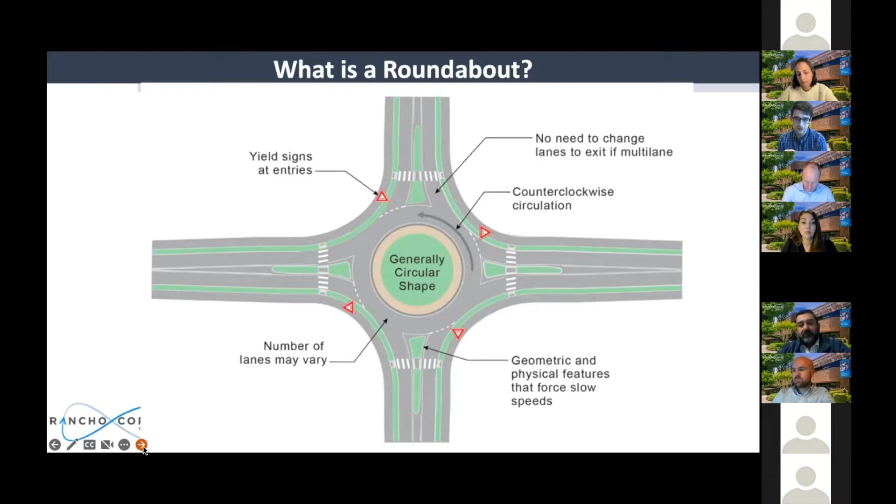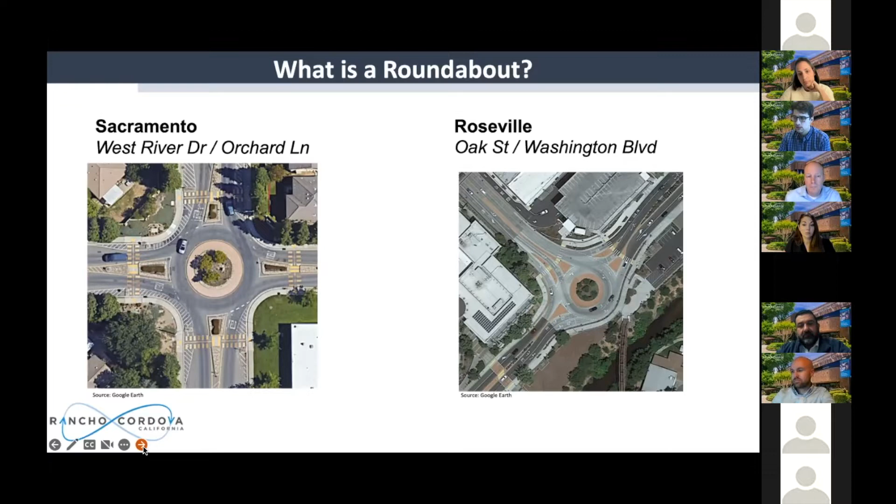Next slide, a couple relatively local examples. As I mentioned before, they can be single or multiple lanes. The one on the left here is single lane, the one on the right is multiple lane. That's also a three-leg intersection, just to show you that they can be in all manner of different locations. That's really just to familiarize yourself - maybe you've been through these before.

So the next slide - I mentioned before, why build roundabouts? Why do this, what are the benefits? Why did the city apply for a grant, why did they get a grant to study roundabouts, and what are the reasons that there's over 7,000 of these now and growing in the United States?

Well, first things first, they're a well-documented safety treatment. We have a few slides later in this presentation to document just how beneficial they are from a safety perspective, what the crash reduction stats are. They also very often have less delay compared to other intersections, so almost always, compared to a stop sign, a roundabout is going to have less delay as you're driving or biking through it.

Especially throughout the day, especially in those off-peak periods - if no one's there, you can proceed right through. And that compares to signals as well, so throughout the 24 hours of a day, you often have huge delay reduction benefits at a roundabout too. It keeps people moving, and then also the safety benefits as well.

And then the next thing is some environmental benefits with that - emissions and fuel savings come along with that delay reduction. There's some access management benefits between allowing U-turns, being able to design it to consolidate movements at and through an intersection. The other thing with a roundabout is there's no signal, no traffic signal hardware, so there's no electricity to run out to the site, so they're resilient in that way and can save operations and maintenance costs in the long term.

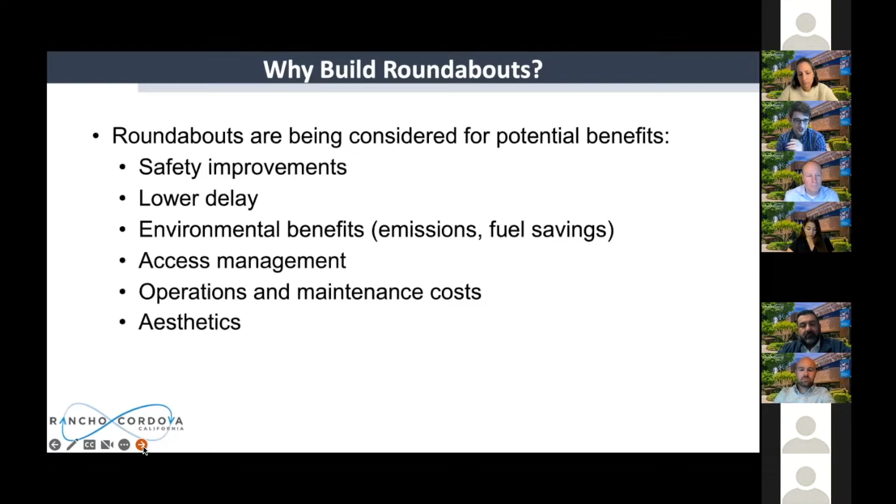And lastly, they give an opportunity for aesthetic benefits - you have this wonderful space right in the middle, you can do landscaping, you can put art there. Some cities have even - like Bend, Oregon has a city art tour where you can go around looking at roundabouts. There's other opportunities there as well.

Next slide, so I have a couple slides on the safety performance. Roundabouts have a kind of staggering safety record. They're often installed where there used to be a stop sign, and in some cases they've been installed in place of signals. There's been just about maybe over a decade of research in the United States comparing roundabouts to other intersection types and showing really staggering crash reduction. So let's go through these a little bit.

Up to 90 or 100% reduction in fatalities, a 75% reduction in injuries, 35% reduction in total crashes, and very little reported pedestrian and bicycle crash experience. Fact is, compared to other intersection types, there aren't as many roundabouts, and there aren't many pedestrian and bicyclist crashes to analyze.

Can you go back to that slide? I want to talk about a couple more things here. So why is that? What's going on with this massive fatality and injury reduction?

On the bottom of this slide, we're showing a typical perpendicular intersection on the left and a roundabout on the right. Imagine traveling through an intersection, and anywhere paths overlap or conflict, we'll call a conflict point. There's 32 of those locations in the intersection on the left.

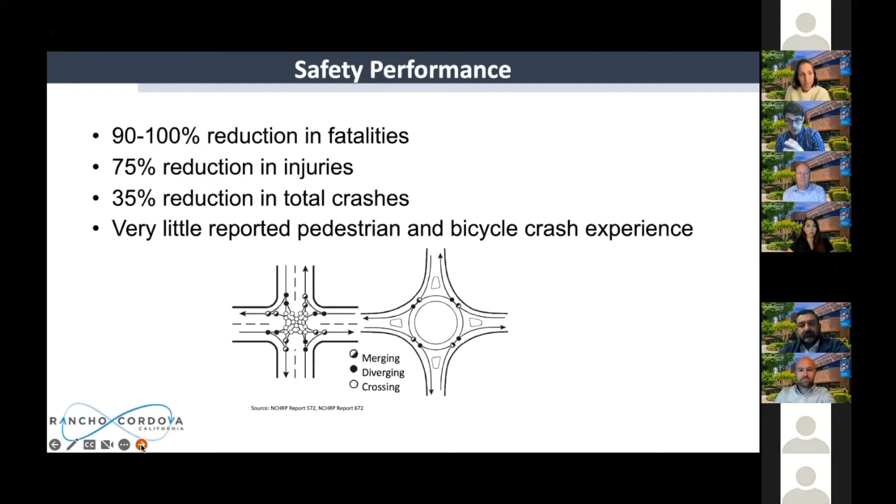In the next slide, I'm going to talk a bit more about safety, and it's really all about speed. If you follow this blue line from left to right, think about traveling through an intersection - maybe 25, 30, 35, 40 miles an hour at a typical intersection. At a roundabout, you're actually deflected, so you really have to slow down. That's one of the key design features of a roundabout, controlling those speeds, keeping them low.

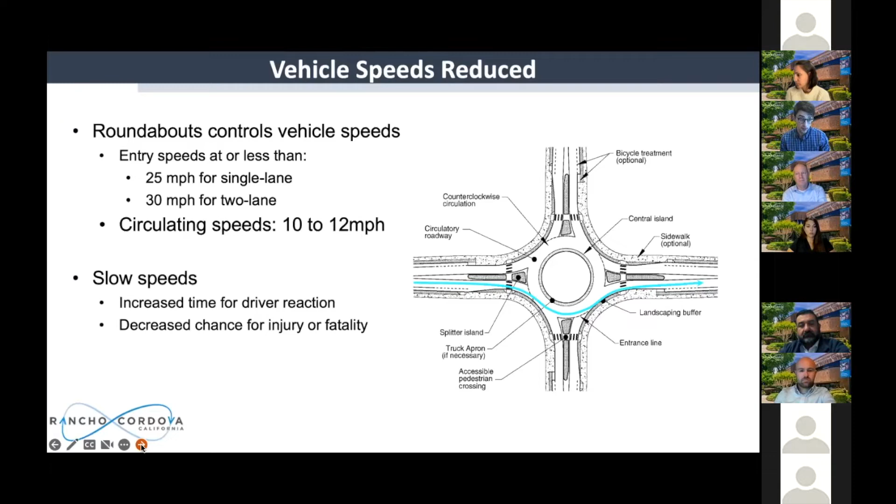So why are low speeds beneficial? Well, one, they increase your reaction time. They require less time to stop. And if and when people do crash, there's simply less energy associated at lower speeds, so there's less likelihood of a really bad outcome - you probably walk away from it. Really, it's all about that speed. That's a bit about safety.

I mentioned aesthetic opportunities before. Just wanted to share a couple of examples we have - some really nice pictures of art on the left, some lovely landscaping on the right. That's just a big, nice opportunity at the center of a roundabout.

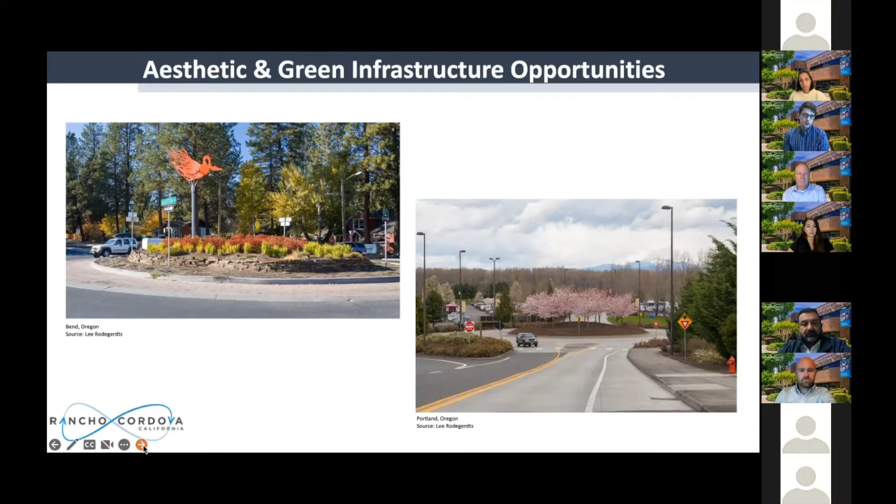Now I want to talk about some common questions that come up, and a few things related to people who aren't driving. In terms of pedestrians at a roundabout, the common question is, what do I do? How do I cross as a pedestrian at a roundabout? I want to talk about a few things - a couple definite benefits and a couple considerations. We can talk more about these in the Q&A later if people have questions.

One is, I feel like a broken record already, but the slow vehicle speed. We know through research that the likelihood someone's going to yield to a pedestrian is really related to speed. If I'm driving slow, I have the opportunity to see a pedestrian, the ability to stop, and it doesn't take me long to do so. We keep those speeds slow at a roundabout - that promotes yielding and allows people to find opportunities to cross.

The next thing is this two-stage crossing. What does that mean? If you look at the top where we have a leader that says median refuge, it essentially means you cross one direction, then stop, then cross the next direction. So you're never out there in traffic crossing multiple directions or lanes at the same time. That's what the two-stage crossing means - it really reduces your exposure and vulnerability.

A couple things in terms of considerations you might have noticed in these slides - the crosswalk location. One of the key design features of a roundabout is you pull that crosswalk off the corner a little bit. That gives drivers the ability to see you as a pedestrian and stop, separate from entering or exiting the roundabout.

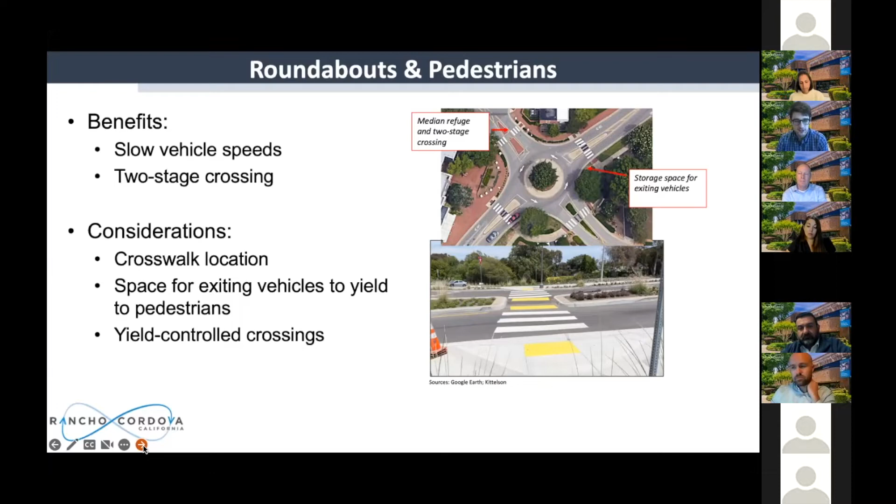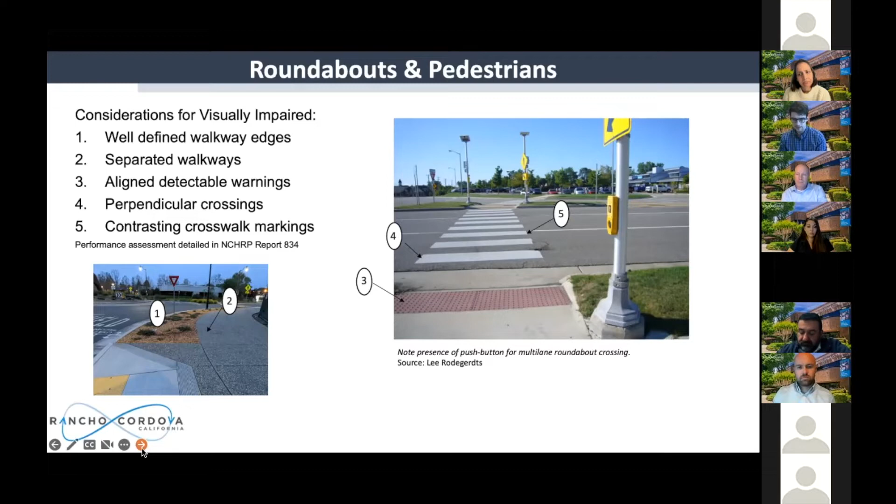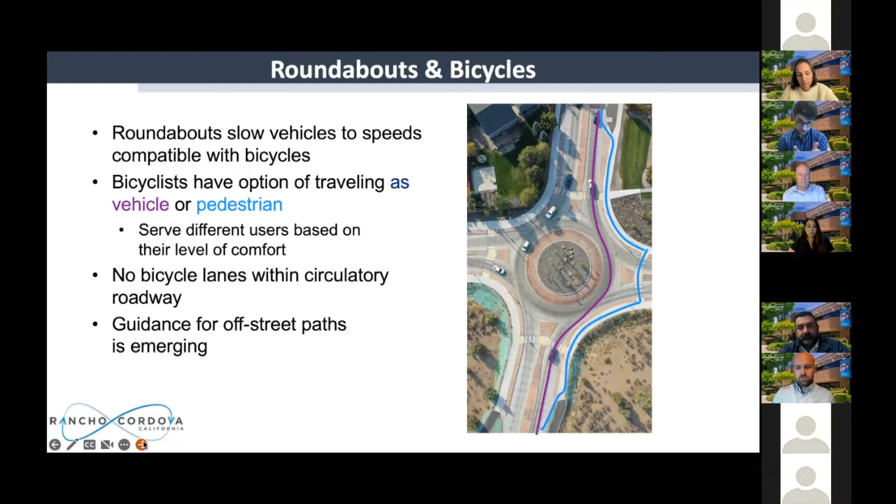And again, I mentioned there's no bike lanes—you wouldn't see a bike lane in the circle. Here we say guidance for off-street paths is emerging. I'll show a little bit on the next slide. This, in the past several years, is some design guidance that has come out through a couple state agencies and has trickled its way across the United States. As separated bike lanes have become more common and a more used design treatment, the question comes up: how can we get a separated bike lane through a roundabout?

On the left here, we're showing how that can look. You can see a separated bike lane coming through, and it's actually separated from pedestrians, so each has their own path. Similarly, there's essentially perpendicular adjacent crossings on a bike, again no need to dismount. On the right here is just an example recently constructed down in San Luis Obispo—again, separated paths through the intersection. All those principles I talked about earlier, keeping it backed off from the circle so people have the ability to stop and yield and operate at those slow speeds, apply here as well.

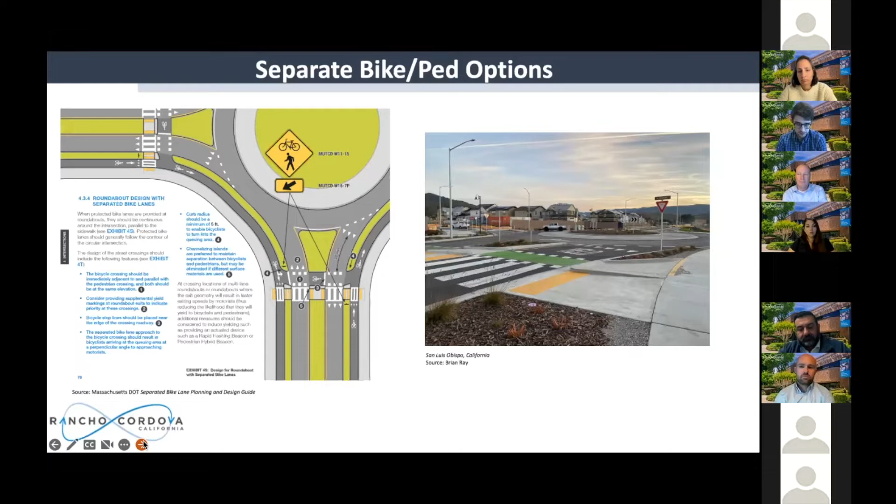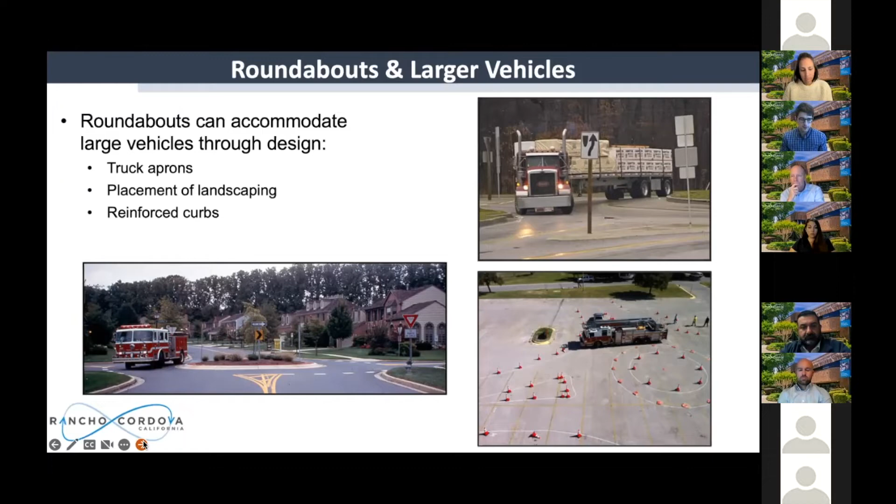So the key message here is, as long as we know and plan for the right context and the right vehicles, a roundabout can serve those vehicles well.

And that concludes the introductory educational portion. So now I'll turn it back over to Katie.

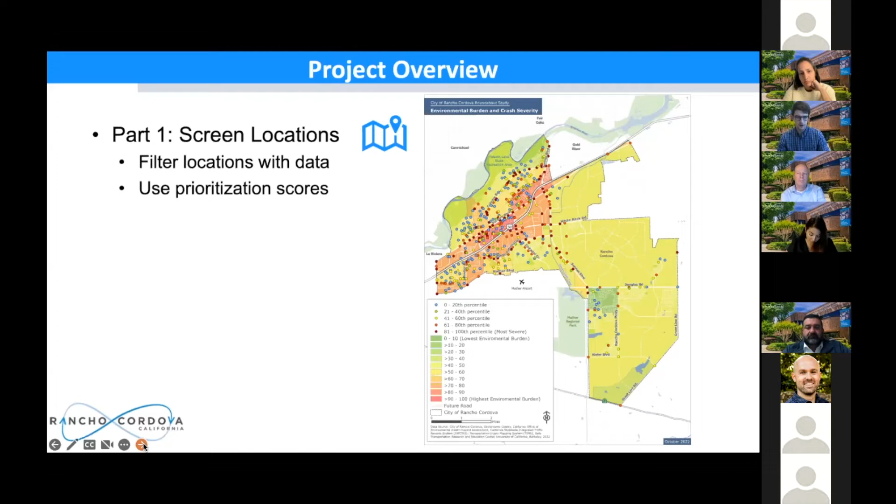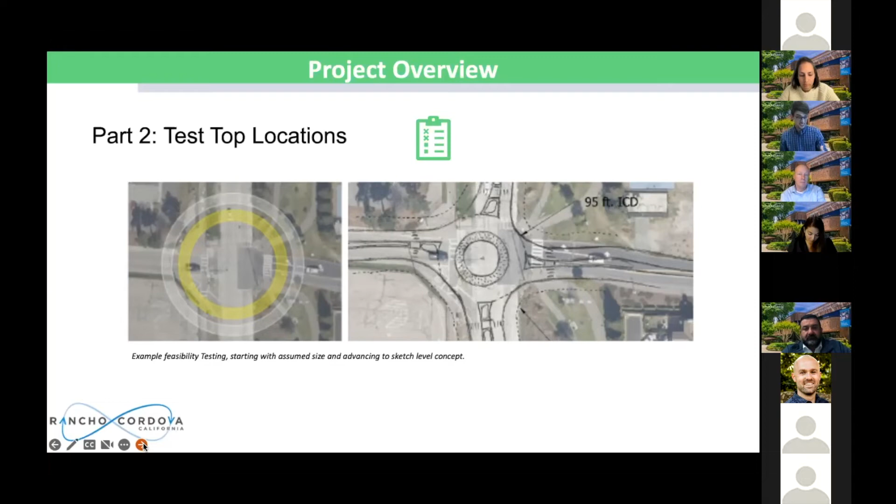So you can imagine a similar exercise here in Rancho Cordova, where we've got 10, 15, 20 intersections. Let's actually sketch it out and see what it looks like. That's what I mean by testing top locations.

From there, if that all works and we test the feasibility, we get locations where roundabouts look promising, look like they'd fit, and actually develop designs in keeping with input from the community. There's a lot of different ways intersections can look, things like size, how do you design for people riding bikes, if there's a bike lane. That's something we'd vet with the city and with you all. We'd bring these ideas and concepts to you, have a couple different alternatives, and come up with the best option. Then once we do that, we document it.

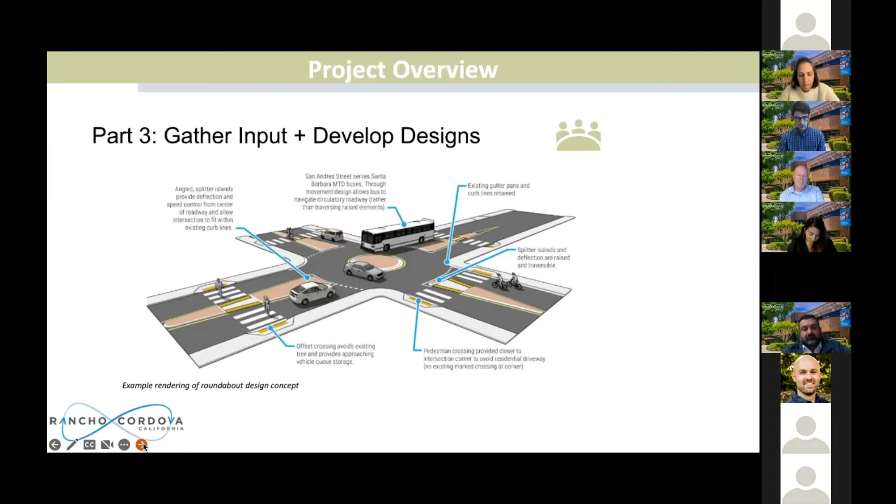At the end, we would prepare city roundabout guidelines. So what happens at the end is we take lessons learned from the project, the data work we did to understand what seems to work for the city for roundabouts. One thing I'd really strongly emphasize, and thanks for showing up tonight, is comments and concerns that come up throughout the project can make their way into the guidelines. If we heard from the community they're concerned about a type of location, or want to prioritize a type of location, that's the kind of thing we can write up in the guidelines so that for the next several years after the project is over, the city continues to prioritize those things for roundabouts.

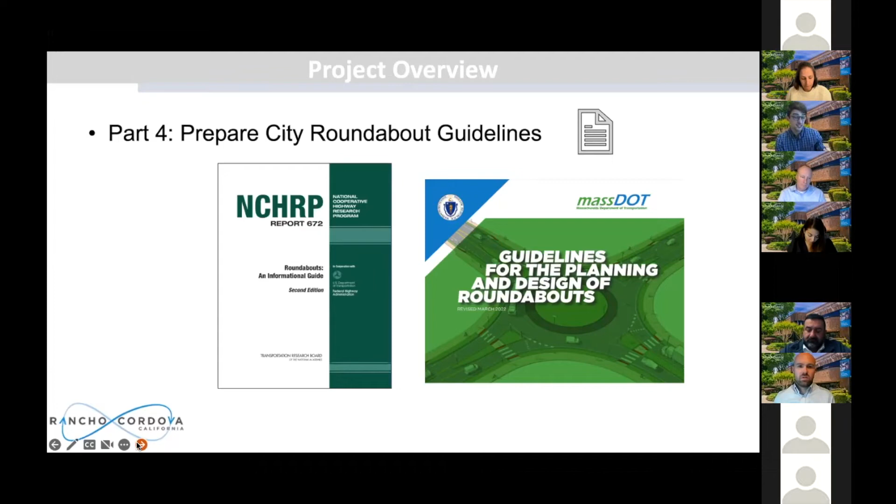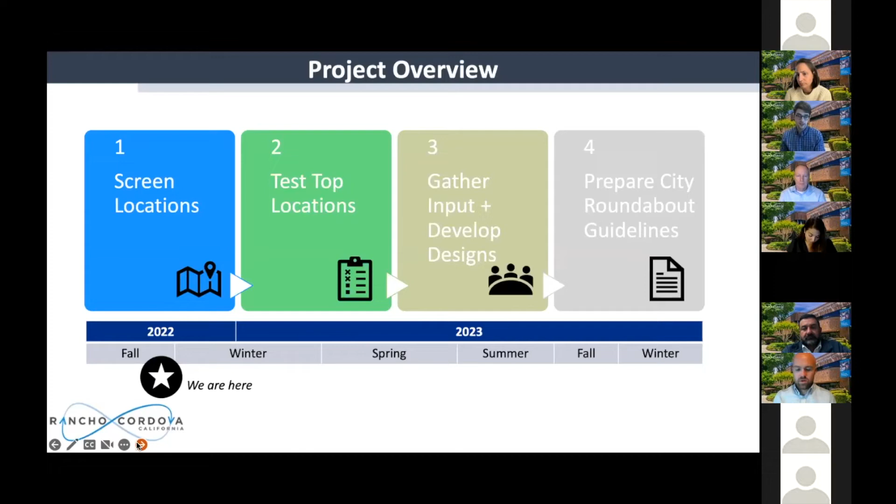And then we'll go back to the project overview. Just to wrap up, we look citywide at every intersection the city owns, every major intersection, and ask the question, is it feasible and what's the priority? Then we actually develop a couple locations to test, go back out to the community, and compare those designs to get your input and feedback. We advance those designs to where they'll be ready for the city to get more funding, or advance them after the project. Then we document what we did, and here's best practices and guidelines for the city moving forward. That's an overview of the project.

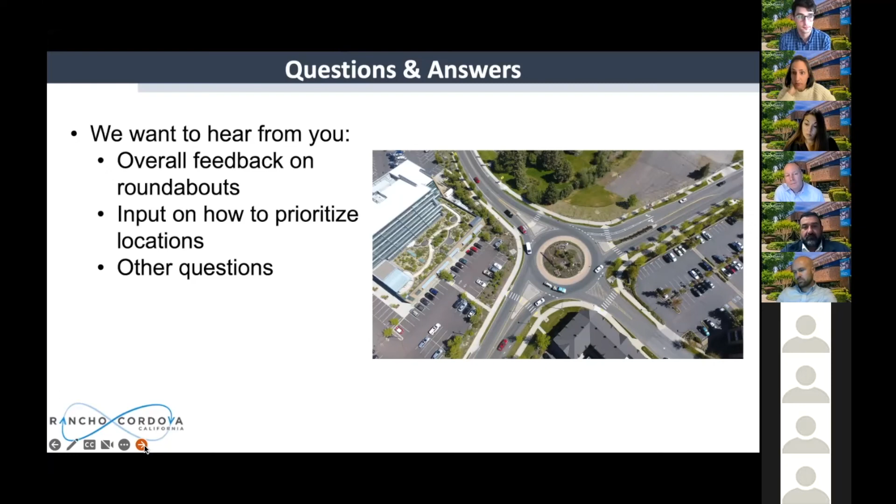We'll keep the chat open, but Tim mentions Rancho Cordova Parkway would also be a good area to look at. Yeah, cars certainly do race down that street a lot. All of this is great data for us to take back with us. I'm going to turn it over to Christine to talk about the next steps of the project.

Thanks, Katie, and thanks, Mike, and everybody for being here, and thank you to all the community members who came and shared such good information. As mentioned, we'll be gathering this data to identify top locations and perform test fits to develop concept locations. The future plan is to document that into an ultimate guideline for the city.

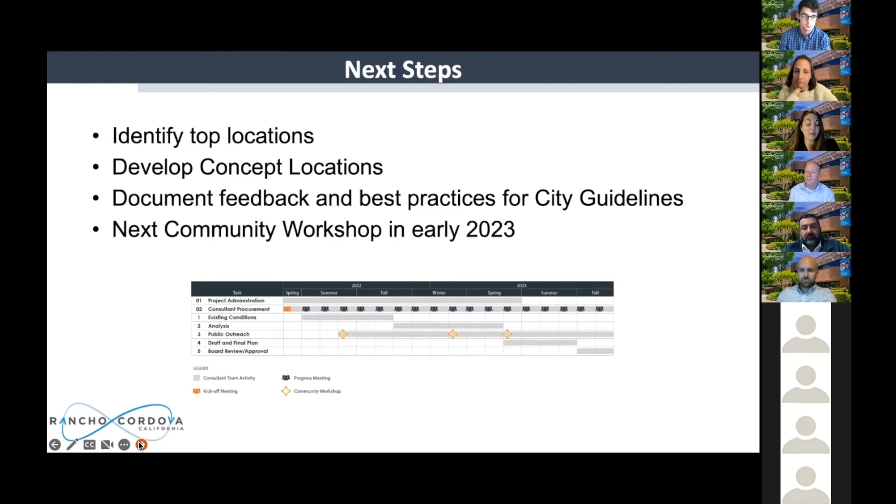We will be having future community workshops as we gather this data so we can present it to the community and get input on prioritization and where to put these locations. We're working with Kittelson to prepare the next tasks, and we're looking to have a future community workshop in early 2023.

As Katie mentioned, we have a website, which is our current project site and includes the Roundabout project. I also wanted to leave you with my email and phone number for any other project questions the community may have. Katie, I'll turn it back to you in case there are final comments before we wrap up.

We have two last comments or questions for feedback and consideration. The first is Alani's curious why the city isn't starting with these types of road designs, as Tim mentioned with Rancho Cordova Parkway. Is the trend now in traffic engineering toward calming? If so, why are new roads and new parts of the city being designed like highways?

It's a great question, I can take the first part of that. One of the elements of this plan is that we're going to put together future guidelines for how we evaluate roundabouts in development and infill projects, so that as new projects come forth, we can look at that during conditioning and incorporate it into the planning. So that's an element this plan will address - not just how we fit them into older parts of the community, but also how we implement them in newer parts as a tool in our planning toolbox.